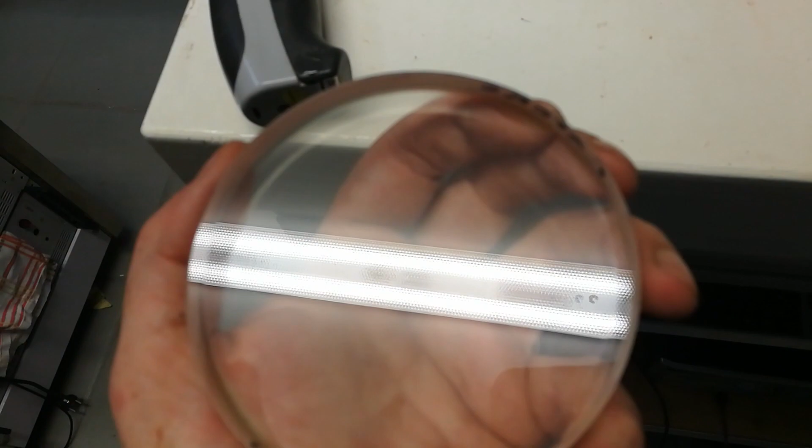Now, this video consists of two parts. If you are just curious about the actual manufacture of the spirit level, it's best to fast forward to approximately 5 minutes into this video. Now, if you're also interested in the details of the design process, please bear with me for the next 4 minutes.

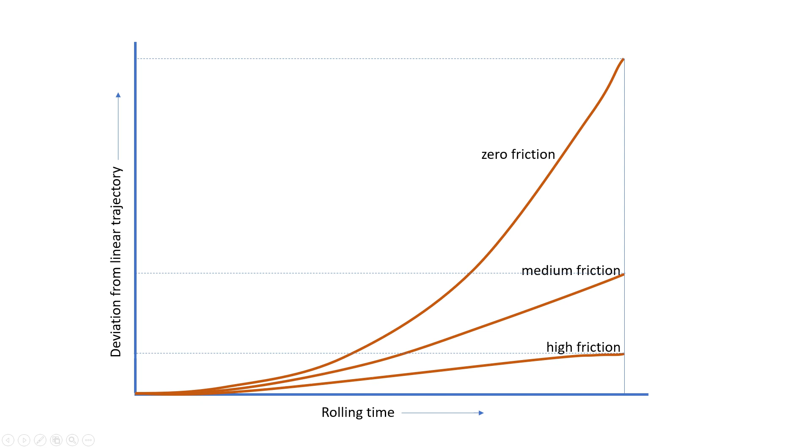So, what kind of accuracy do we need to level a billiard table? Well, it's not a trivial question, and it very much depends on the maximum deviation of the balls that one would find acceptable. And every shot is different in angle, in power, in direction. Also, different types of billiard cloth have different friction coefficients, and all these parameters influence how much the leveling of the table influences the maximum deviation of the ball.

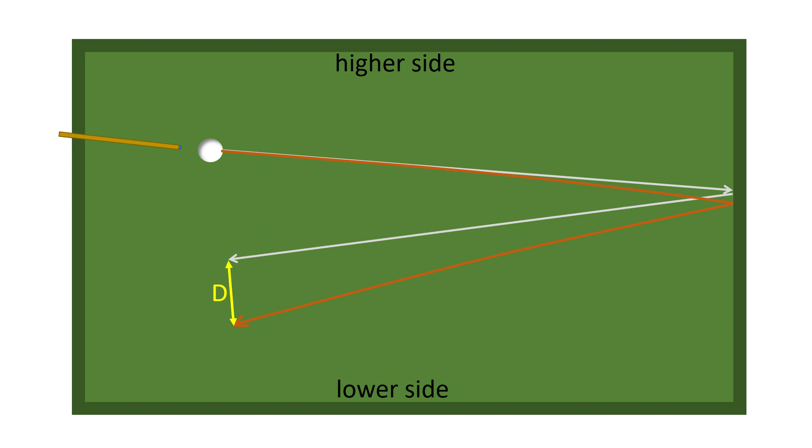Let's just consider an example. Let's just say you play a ball over the long side of the table and it rolls for about 4 seconds. Now, I did some calculations and experiments and I basically arrive at the following conclusion. In the described configuration and with the table under an angle of 1 degree, the deviation will be in the order of several hundreds of millimeters, so actually quite huge.

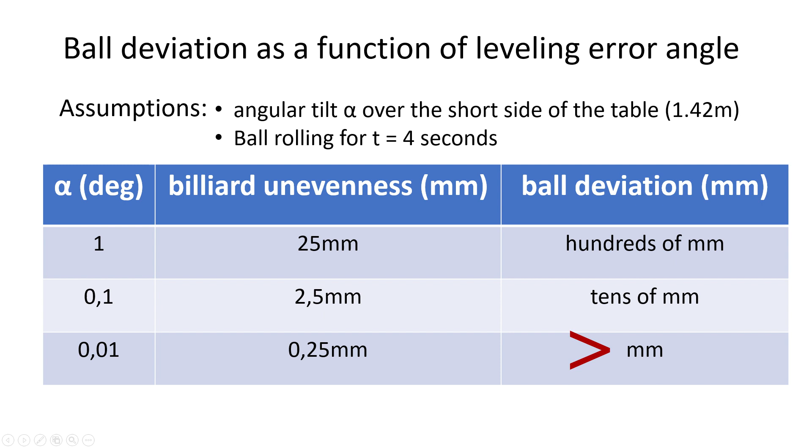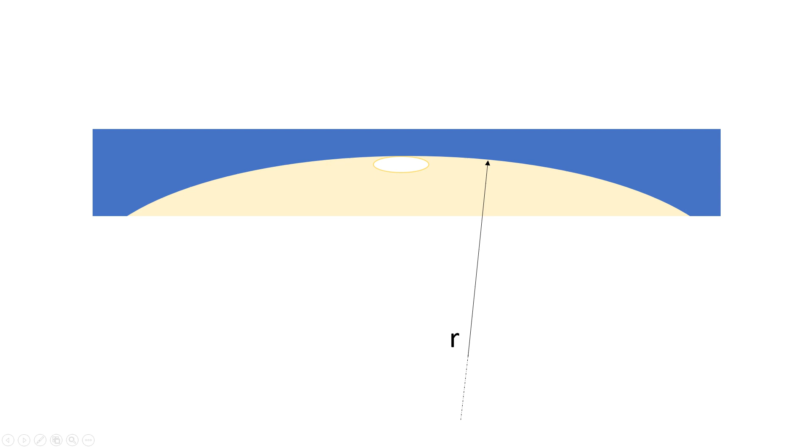A spirit level is basically just a bubble in a curved surface, and the maximum sensitivity is dependent on the curvature holding the bubble. Now, in theory, the larger the radius of the curvature, the more sensitive the movement of the bubble will be as a function of the tilt angle. And because of the required accuracy range, I wanted the sensitivity to be approximately 1 millimeter for each 100th of a degree of tilt. And this because 1 millimeter would be easily visible to the naked eye.

Now, in addition, I wanted to have a measurement range of approximately 1 degree in total, so this means that the spirit level needs to be approximately 100 millimeters in diameter. As for the curvature of the surface, if 100 millimeter corresponds to just 1 degree, we can calculate the required radius in the surface, and this radius turns out to be approximately 5.7 meters, which is actually pretty big. And it also means that the curve in the surface of the spirit level is very shallow.

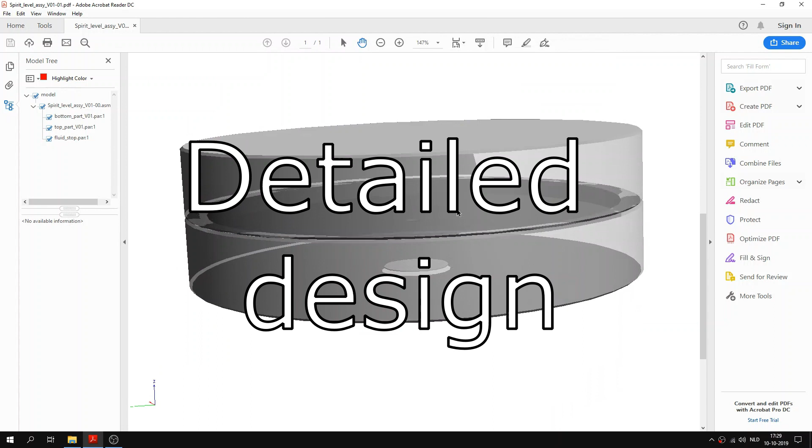As for the construction material, glass was the obvious choice for me personally because I have a lot of experience working on it. It's also transparent, it's very stiff, and therefore you can make very accurate shapes in it. And I decided to make the bubble level from 2 glass discs with the same diameter. In the detailed design, I focused on how to make the spirit level with the tools and materials that I had directly available in my workshop.

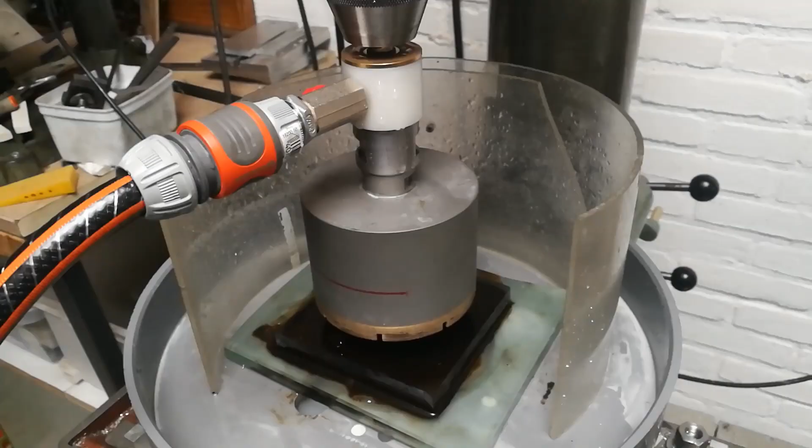And I had some borosilicate glass of around 50 millimeters thick left over from a previous project, so I decided to use this material. However, my biggest glass drill has an inner diameter of only 97 millimeters, so in my final design I chose the diameter somewhat smaller and chose the radius of curvature slightly smaller as well. In addition, I brought down the total measurement range to approximately 0.8 degree in total.

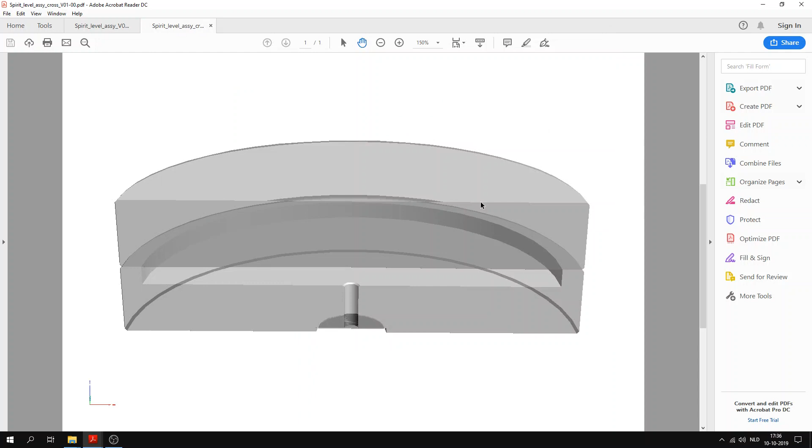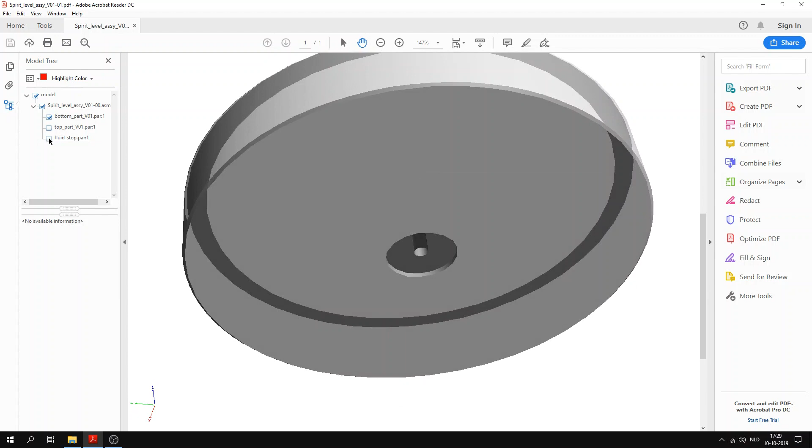Now, if you look at the CAD drawings, the surface with the curvature actually appears to be flat, and that's because the radius of curvature is over 5 meters. In the bottom part, I added a cavity for the bubble to move around, and this has a height of around 4 millimeters. I also designed a hole in the bottom to fill up the inner space with liquid and to insert a bubble.

Now, in addition, I wanted it to be calibrated by design. So I know this sounds rather peculiar, but what I mean is that I wanted the accuracy of the two parts at a level where you could just put them together without the further need of calibration.

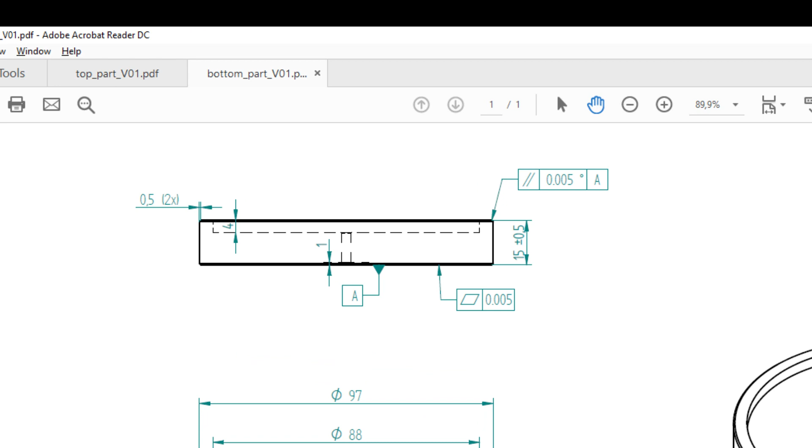So to achieve this, you need to put very strict tolerances on, for example, the parallelicity of the edge of the lower part with respect to the bottom surface, and also on the flatness of the bottom cup and the centricity and the quality of the spherical surface. So that's what I did.

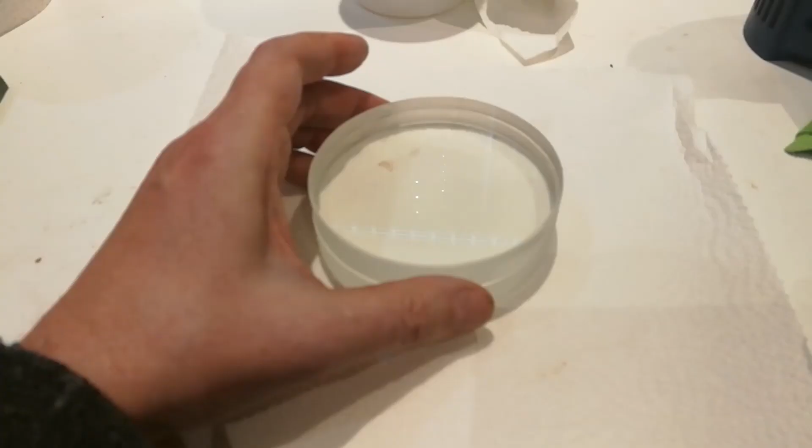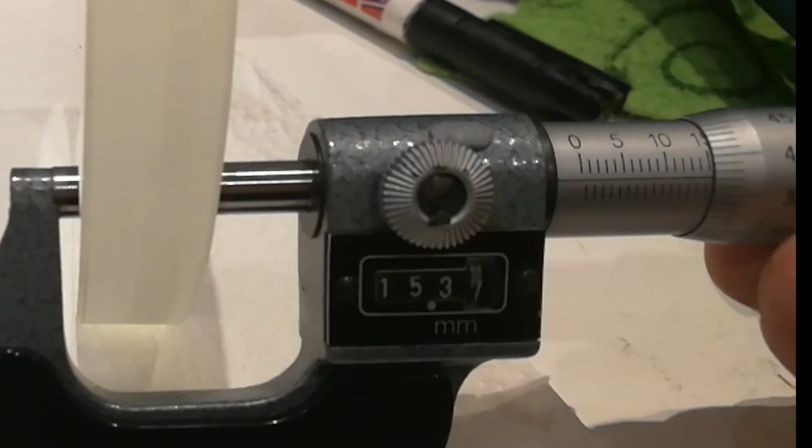I started out drilling 2 discs from a borosilicate plate, and this material by itself is pretty flat, but it's not flat enough for this purpose. So I grinded both sides of the 2 discs flat against each other by using a small amount of 1200 mesh silicon carbide suspension and very short strokes. Now the flatness and the roughness levels after grinding were in the order of only a few microns.

Next I milled a pocket in the bottom disc with a diamond tool and drilled a hole through the center. Now because the result of the milling was kind of ugly, I cleaned it up a bit using additional grinding with some silicon carbide and a small glass disc.

Now because I wanted the part to meet this previously described calibration by design, I needed to get the height of the edge as uniform as possible all around, and this could be achieved by fine grinding it against a very flat glass plate and by selectively applying more pressure on a specific side. And in this way I got the thickness variations on this edge in the order of 5 microns or less.

Next is making the top part. Now the radius in this part is over 5 meters, and this requires a curvature of only 0.2 millimeters deep. So instead of milling a radius first, I just grinded a radius in the top disc using a third glass disc and some silicon carbide.

So the way this works is that you concentrate your grinding action on the edges of one disc using the center area of a second glass disc. Now, due to the uneven material removal on both discs, one disc will automatically become concave and the other one will become convex. And then when you gradually go to smaller grains and to smaller strokes again, it's possible to end up with 2 spherical surfaces.

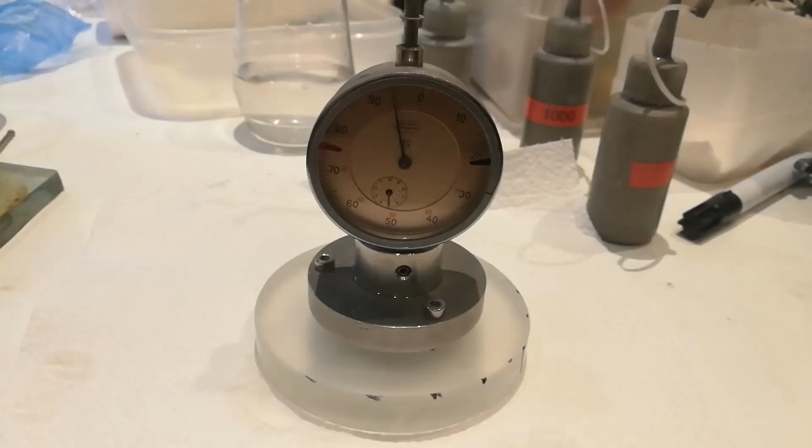The end result of the grinding is a very slightly concave surface in the top disc. And with this spherometer I checked the radius and it turned out to be 5.44 meters, which was good enough for me at this point. Later on I used this value to calculate the exact scale of the spirit level.

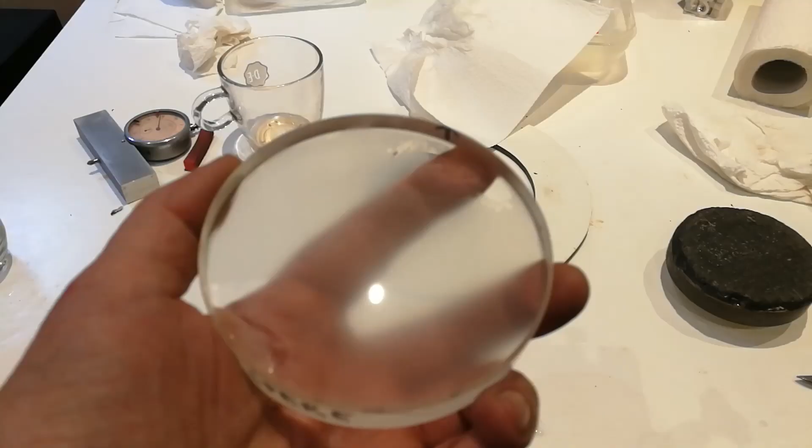I use optical pitch polishing to smooth the spherical surface, and after about half an hour the surface is nicely polished. And now it was time to make the edge on this glass, which can be used to connect the 2 pieces together. Now by carefully grinding the edge for a few minutes against a flat glass plate, I got a fine ground edge on the glass.

Next is polishing. I polished the top surface since it was ground flat and optically not completely transparent. I also polished the 2 surfaces of contact between the 2 discs, and I did this because I had kind of a wild idea of how to connect them, which will be discussed in a minute.

Now for polishing I used a home-built annular machine, and I will not discuss this machine here, but instead we'll get back to it in a future video. It's actually a heavily simplified version of the large annular machines that you find in the manufacture of flat optics, for example.

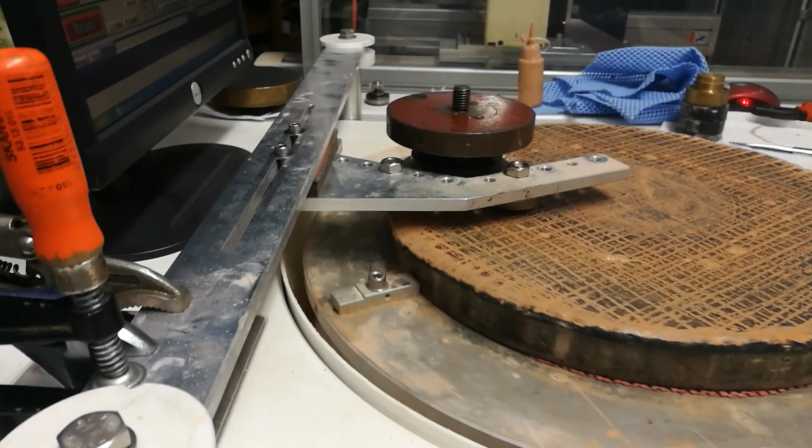So basically the machine consists of a flat ring of pitch, and the object to be polished is held in such a way that it's freely spinning over the pitch ring, and it does not stay in the same position, but it's moved periodically over the extent of the ring from the inside to the outside and back.

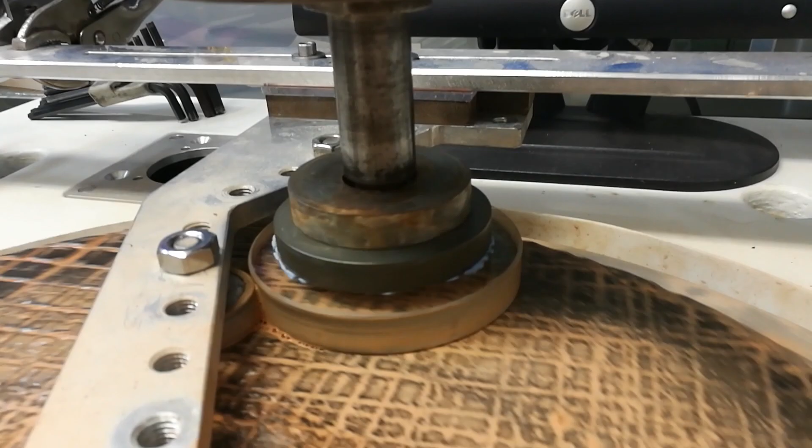Now here you see that I added some weights on top of the glass disc to speed up the polishing process a bit. And here you see the result of the polishing of the edge next to the spherical surface. Now if you look really carefully, you can see the outer edge of 5 millimeters that reflects the light in a slightly different angle. Now in the same way I polished the surface of the rim on the bottom disc. So these surfaces were now very flat after polishing, let's say a quarter lambda.

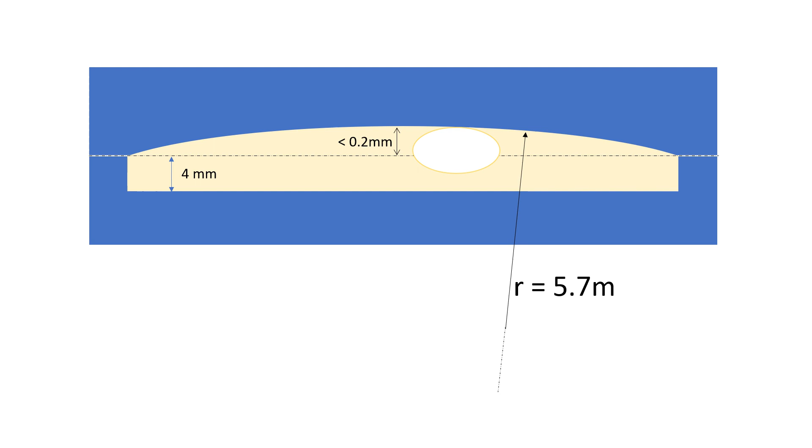And while I was working on this, I figured out that it may be possible to connect the 2 pieces without glue by using a technique called optical contact bonding. So the idea of optical contact bonding is that you bond 2 surfaces together purely by molecular forces, the so-called van der Waals forces. And this is basically the same force that holds the molecules or atoms of a solid together.

Now, why would I want to try this? Well, using this method could actually avoid uncertainties in the thickness of a glue layer that connects the two parts. So a variation in this thickness could actually screw up my so dearly desired internal calibration thing. But in order for this method to work, the surfaces have to be very clean and flat over the complete extent. So I tried it and it worked quite easily.

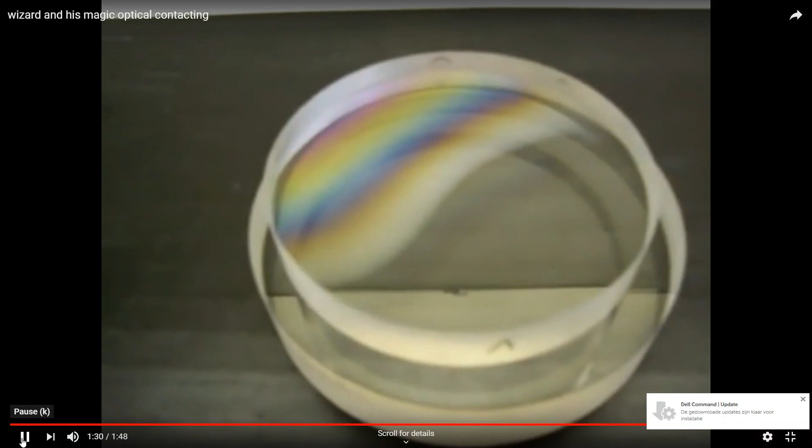Actually, in my very first attempt, the two parts connected so quickly and firmly that I did not even have the chance to get them aligned properly. Now, I tried to get the details of the process into view, but that was not very successful. So instead, I'll just post a few links to very nice videos showing you the bonding process in detail.

Now, even though the contact bonding was successful, it turned out that the bond was actually not strong enough to withstand expansion of liquids between the two discs under temperature gradients. So if you put it in your pocket, it heats up and then it starts leaking. So eventually I just glued the two together using a very thin layer of UV curable epoxy.

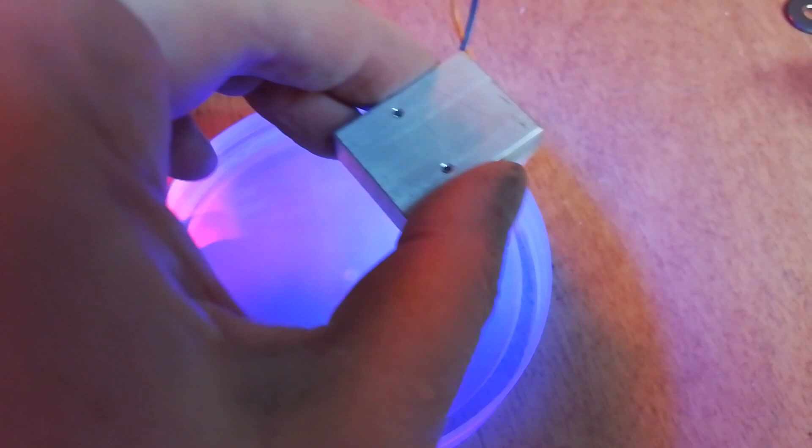Next step was filling the cavity between the two discs. I used very cheap ethyl alcohol because of the lower viscosity and the lower surface tension compared to water. Now, the high surface tension of water actually inhibits the free flow of air bubbles, especially if the bubbles are small. Now, after filling and leaving an air bubble in the void, I sealed the backside with a small disc and some more UV epoxy. So here it is, the 1/100th of a degree accuracy bubble level.

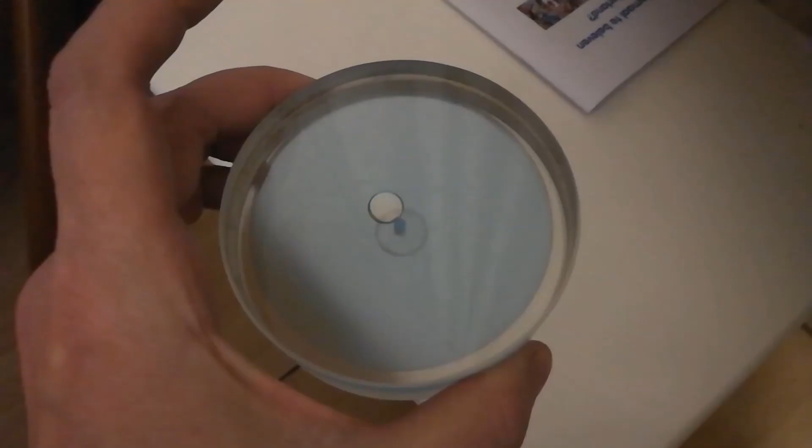Next, I took it home and checked how horizontal things were in my house. And most things actually went off scale, although I was quite impressed with the level of our kitchen workspace. I added a quick scale on the back of the bottom part to get a better idea of the magnitude of the deviations. I just want to show you one more thing.

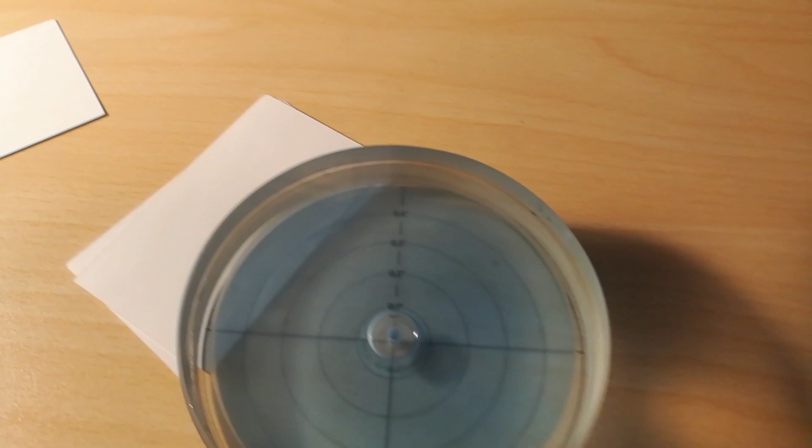Nowadays, everybody's carrying around bubble levels in the shape of a smartphone and an app. And some of them appear to have an accuracy of 0.1 degrees. Now, to see if this makes any sense, I leveled my spirit level to about 100th of a degree using sheets of paper. And I placed my smartphone on the top surface, which in this case is actually also very horizontal. Now, the smartphone displays a deviation of 1.8 degrees.

But, is it the phone or is it the spirit level? So I rotated the phone on the surface, and what you see is that the error rotates exactly with the phone. It even shows the identical value in all directions. So this proves that it is the phone that is actually inaccurate by 1.8 degrees. And of course you can calibrate it, but it would require a surface better than, let's say, 0.1 degree horizontal.

In the meantime, the balls on my dad's billiard table are rolling in razor straight lines, leaving no room for any errors. And that's it for this video.